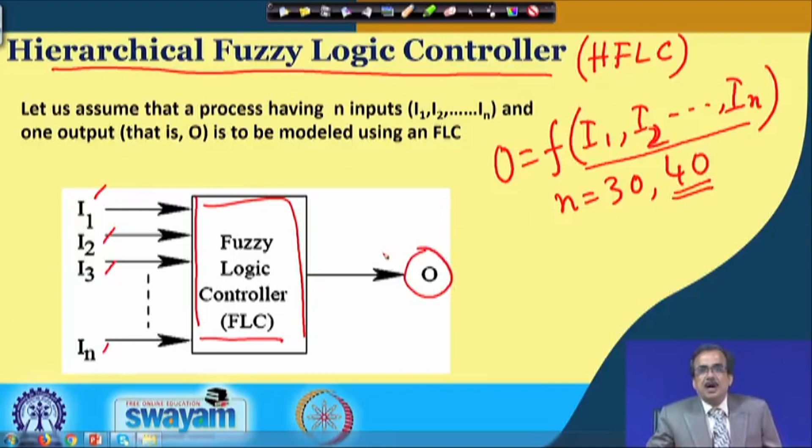Now, say if I consider n number of input parameters, for example, this is nothing but your fuzzy logic controller, and it has got a number of inputs like I1, I2, I3 up to In, and supposing that n is equal to 40 and that I have got only one output. Now, what is the maximum number of rules which I will have to design?

To represent each of these input parameters like I1, I2 up to In, supposing that I am using small m number of linguistic terms. If I use m linguistic terms to represent each of the input variables, and there are n such input parameters, then the maximum number of rules will be m multiplied by m multiplied by m, n times, because we have got n input variables. For each input variable, I have got m linguistic terms, and this will give rise to m raised to the power n, which will be a very high number.

Now, let us just try to put some numerical value. Supposing that small n is equal to 40, and I am considering small m equal to 5. That means, I am using 5 linguistic terms to represent each of the variables. So, the total number of rules will become m raised to the power n, that is, 5 raised to the power 40. This will give rise to a very large number. So many such rules you will have to design and consider while determining the output for a set of input parameters.

So, it is a bit difficult in terms of computation. As the number of input variables increases and as the number of linguistic terms used to represent each of the input variables increases, what will happen to the number of rules? The number of rules is going to increase like anything, and computationally it will become very complex.

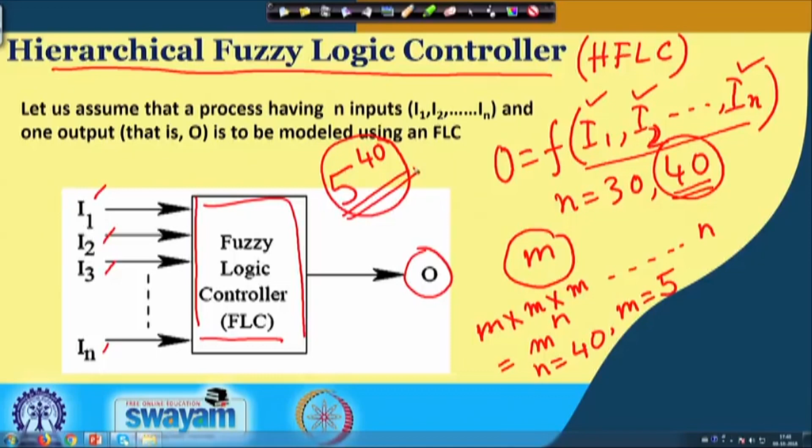Now, let me summarize whatever I have discussed. Supposing that I am going to handle a real world problem having a large number of input variables, and I use, say, 4 or 5 linguistic terms to represent each of the input variables. So, we need a very large number of rules, and as the number of rules increases, the computational complexity of this fuzzy logic controller is going to increase.

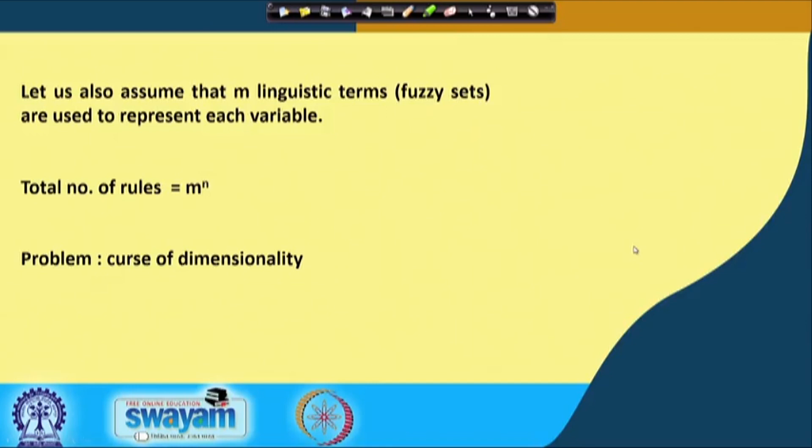So, this is not desirable, and this particular problem is known as the curse of dimensionality. If you see the literature, people are using this particular term, that is, curse of dimensionality. So, the fuzzy reasoning tool or fuzzy logic controller is suffering from this particular drawback, and that is nothing but the curse of dimensionality.

Now, how to solve this particular problem? To solve this particular problem, the concept of HFLC, that is the hierarchical fuzzy logic controller, has come into the picture. Now, let us try to understand the working principle of this HFLC. To understand the working principle of this HFLC, I will have to concentrate on this particular

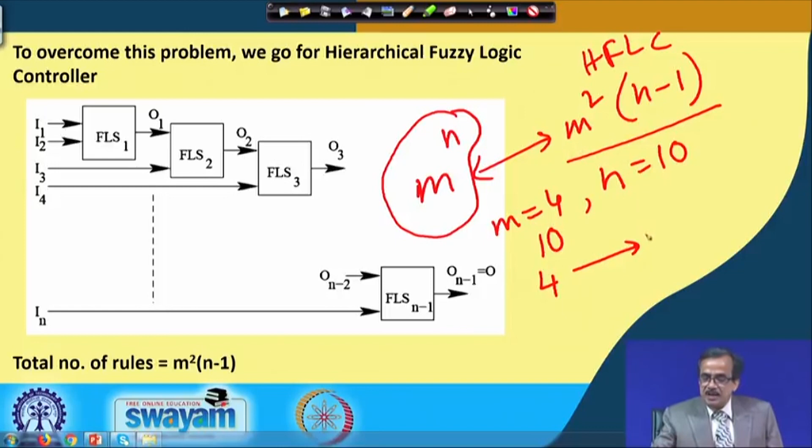So, here I am getting m squared, that is nothing but 16 multiplied by n minus 1. So, that is nothing but 9, and this is equal to 144. So, in place of 4 raised to the power 10, I am actually using only 144 rules. So, this is actually the advantage of using this HFLC, that is the hierarchical fuzzy logic controller.

Now, to conclude, for a problem having a large number of input variables, we generally go for the hierarchical fuzzy logic controller. Now, this is the merit, the advantage of using HFLC, but it has got one demerit also. That particular demerit is as follows: we may not get the actual level of accuracy which we get in the conventional FLC.

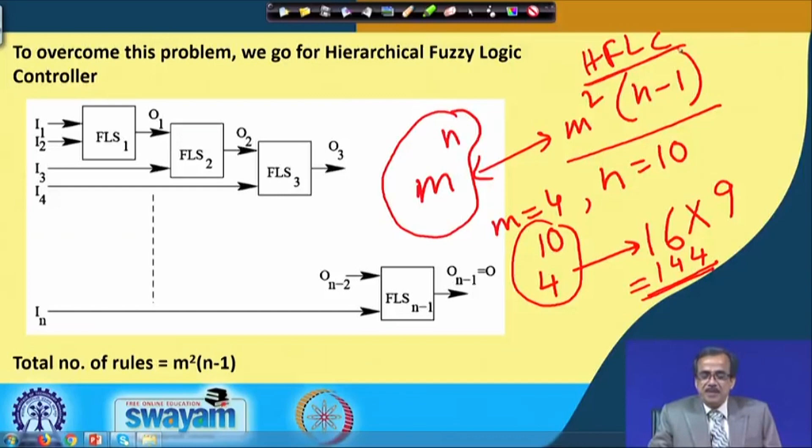So, we will be getting less accuracy in HFLC in comparison with the conventional FLC, but computationally HFLC is faster compared to the conventional FLC. So, these are the relative merits and demerits of conventional FLC and HFLC.

Now, we are going to concentrate on another thing, that is called the sensitivity analysis of a fuzzy reasoning tool or fuzzy logic controller. Now, let us try to understand the meaning of the term sensitivity. By sensitivity what we mean is the change of output to the change in input. So, sensitivity S is nothing but the change in output to the change in input. That means, for unit change of input, what should be the amount of change in output, that is nothing but the sensitivity.

So, supposing that I have got one FLC which is used to model a process having two inputs I1 and I2, and I have got only one output. Now, my aim should be how to find out the rate of change of output with respect to I1 and the rate of change of output with respect to I2. That means, if I make unit change in I1, what will happen to the change in output, and if I make unit change in I2, what will happen to the change in output. So, those things we are going to find out.

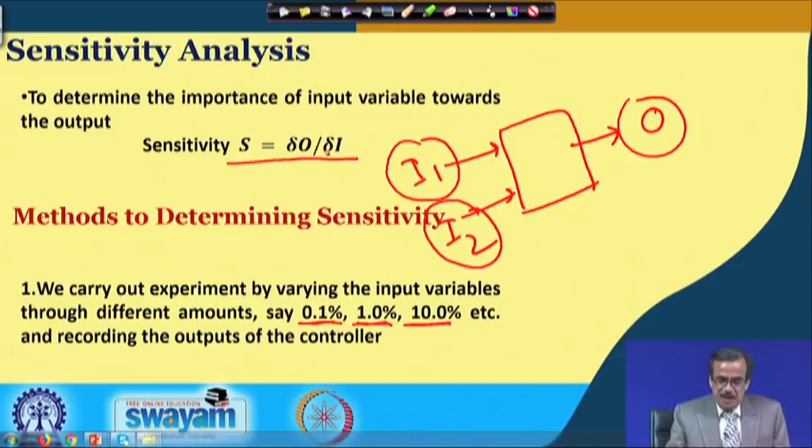Now, this is a very crude way of doing it. Mathematically also we can find out this particular sensitivity. Now, let me concentrate on a fuzzy logic controller which is going to determine the output for two inputs I1 and I2. So, output is a function of the two input parameters I1 and I2.

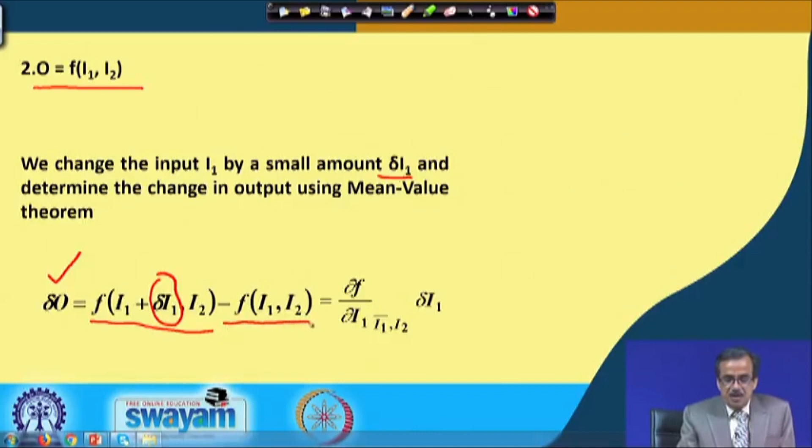Now, we just change the input I1 by a small amount, say delta I1. So, we try to find out the change in output, that is delta O, and that is f of I1 plus delta I1 comma I2 minus f of I1 comma I2. This is nothing but the change in output, delta O, and that is equal to the partial derivative of f with respect to I1 multiplied by the change in I1, that is delta I1.

So, this is the way we can find out the change in output using the mean value theorem. Using the mean value theorem, we can write this down and find it out. Now, supposing that the mod value of this partial derivative of f with respect to I1 is coming to be greater than 1.

So, if it is found to be greater than 1, we can write down that your change in output is greater than your change in input. That means, if I change the input by a small amount, I will be getting more change in the output. So, this I1 is actually very significant. So, we can determine the sensitivity analysis following this particular method.

Now, in place of I1, I can also carry out the sensitivity analysis for I2, and if you carry out the sensitivity analysis for I2 by following the same principle, I can also find out what should be the change in output corresponding to the unit change in your input, that is your I2. So, sensitivity analysis can be carried out both for I1 and I2 separately by following the same procedure which I have already discussed.

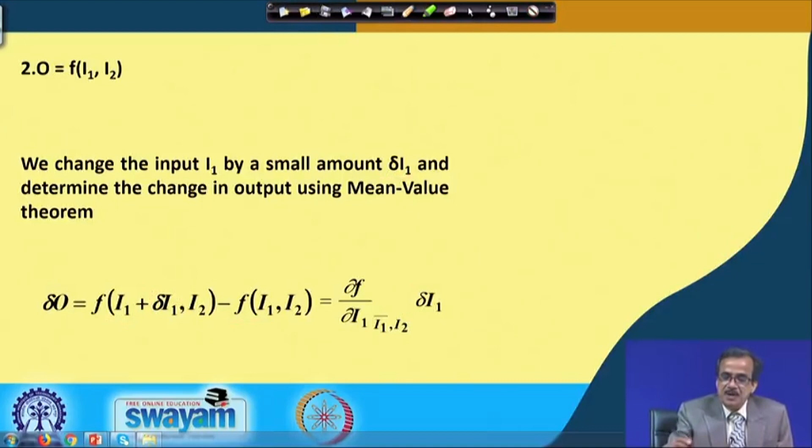Now, this is what we mean by the sensitivity analysis of the fuzzy reasoning tool, and we can find out the contribution of the different input parameters or input variables towards its output. Now, I am going to discuss the merits and demerits of this fuzzy reasoning tool or fuzzy logic controller. The first point is that the fuzzy reasoning tool is a potential tool for dealing with imprecision and uncertainty. This I have already discussed several times.

The second merit or advantage of FLC is that it does not require an extensive mathematical formulation. That means, if you want to find out the input-output relationship, we need not go for the differential equation and its solution. If the designer has some information of the process to be controlled or modeled, he or she can design the rule base and the database, that is, the knowledge base of the fuzzy logic controller, and once that knowledge base has been determined, if we send one set of input parameters, you will be getting the output.

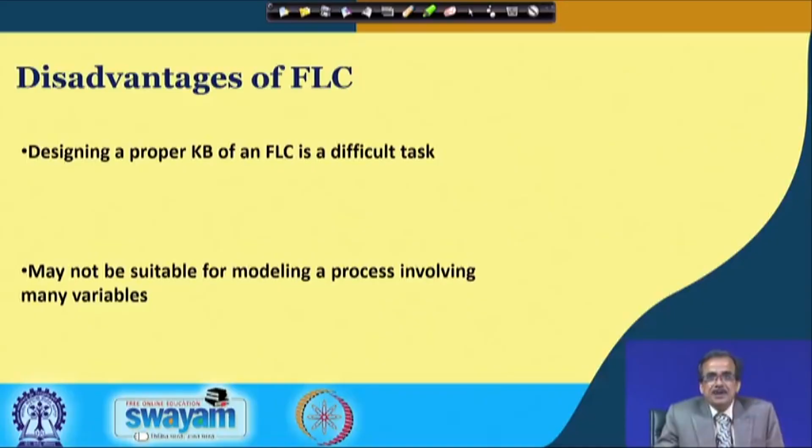Now, I am going to concentrate on the demerits. The performance depends on the knowledge base, and how to determine the optimal knowledge base, that means the database and the optimal rule base, is a difficult task. The fuzzy reasoning tool does not have any inbuilt optimization tool. So, you will have to optimize or train this fuzzy reasoning tool with the help of an optimizer and the known input-output data.

That means, we will have to design and develop the knowledge base of this fuzzy logic controller or fuzzy reasoning tool. As I told, determining the proper knowledge base is not an easy task, and we will be discussing how to design and develop the optimal knowledge base of a fuzzy reasoning tool or fuzzy logic controller, so that it can perform in the optimal sense.

Now, the next point: it may not be suitable for modeling a process involving many variables. This problem we have already discussed. If there are a large number of variables, like in weather forecasting, a very difficult real world problem, there will be a very large number of input parameters or input variables, and consequently the number of rules is going to increase like anything, and the computational complexity is going to be very heavy.